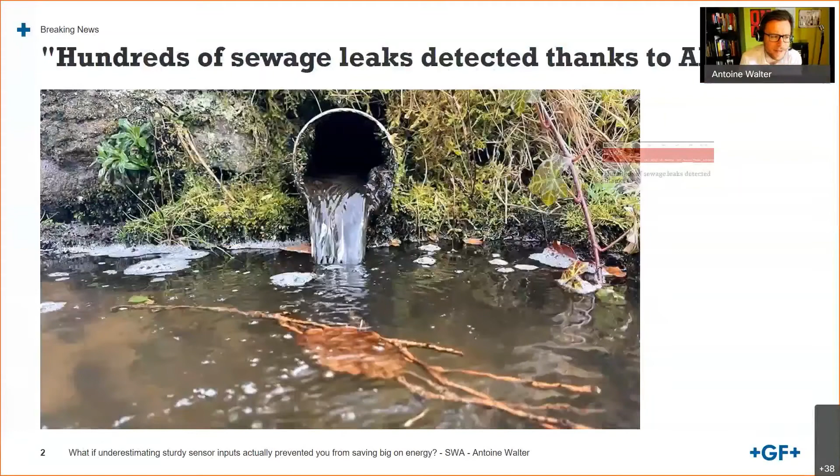Let me here share you something that happened very recently in the UK. It's a story of two wastewater treatment plants that, unfortunately for them, made the news because they were leaking untreated wastewater into the rivers. And not just once, they found out that those two wastewater treatment plants had been leaking sewage for the past decades, approximately 1,000 times. And actually, the operators of those plants never noticed that they were doing that. So they didn't do it on purpose.

It just happened. And the way to detect that was actually to use artificial intelligence. It was a study done afterwards by some scientists in the UK to check on those plants and to see if there was some spillage. And let's see what actually happened.

What actually happened is that those plants were very well operated. So it's not about shaming the operators. And the UK is a highly regulated country, so it's not like nobody would care. But if you're not looking at the right place, there's almost no chance for you to detect something which is outside of your focus.

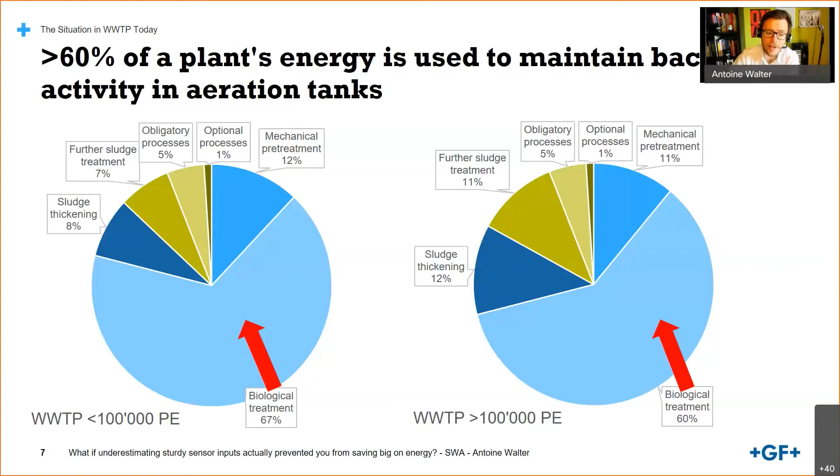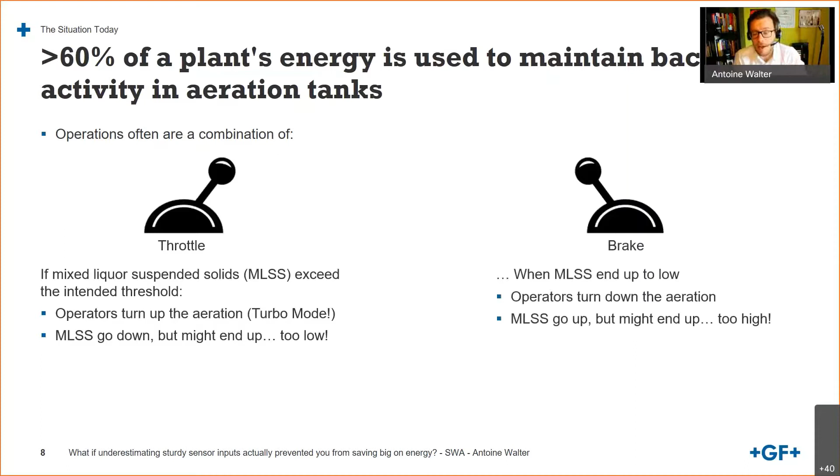Why do we consume so much energy on the biological treatment? Well, because we use a combination of throttle. We look at the mixed liquor suspended solids. If they exceed the intended threshold, you pump up the aeration, push the turbo mode, and they go down. But when they go down, at some point they end up being too low, so you brake. And when you brake, the MLSS go up again, and you can end up in the same situation where they are too high. So what do you do? Well, you repeat.

That sounds crazy when you look at it like that, but that is happening every day in every wastewater treatment plant in the world. It's this combination of one day turbo mode, one day slow, one day turbo mode, one day slow, which means you are never operating at the optimum. And why is that happening? That's happening because we have a hard time nowadays understanding where we stand in terms of organic loads.

It is very hard to predict. It's very hard to understand where this organic load is located when it comes to the secondary treatment, when it comes to this biological step. And that is really difficult as an operator, because if you don't have a clear sight of what's happening within your network and within your plant, you have no chance to do better than what you do today.

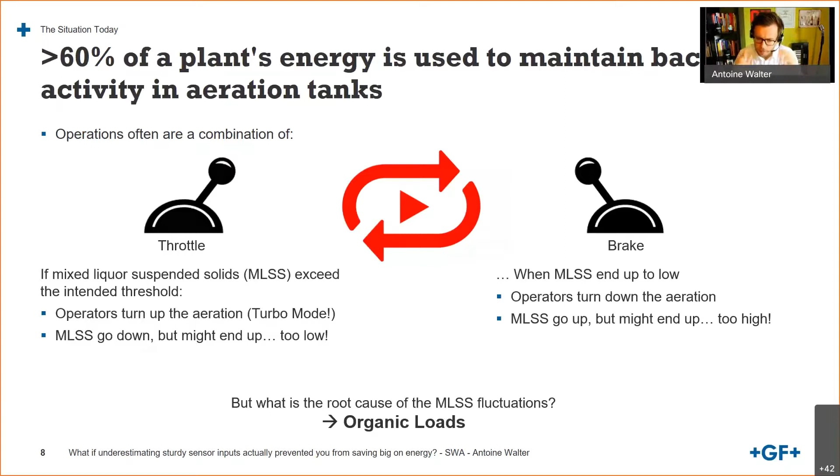So let's look at a very simplified way to underline that problem, and that is this representation of a network. Don't worry, I know there's no network in the world that simple, but just to make it simple, I made it schematic. On the right hand you have the wastewater treatment plant, and on the left hand you have the network. In my network there are 2 industries and 2 residential areas. In real life there are thousands of them, but you're going to see that even with these 2 and 2, it's already difficult. And even with this only 4-step on the right hand, it's going to be difficult.

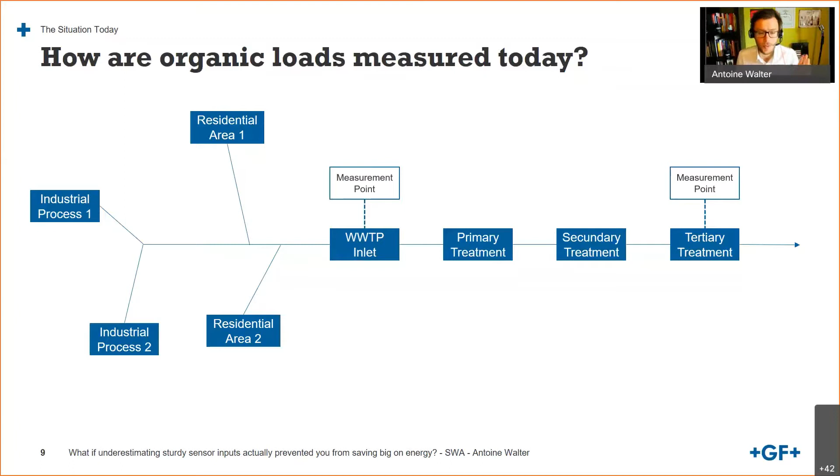Why is it difficult? Because today, where do we measure organic load? We measure it at the inlet of the plant, so at that point you measure everything. And then we measure it a second time, at the outlet of the plant. So hopefully, with this point at the inlet, you get sufficient data so that your plant treats everything to the expected level, so that by the outlet you are within your allowance and reach your expected treatment target, and you don't have to stop discharging or take a fine or be in trouble. But that is still wishful thinking, because actually what you're looking at with that single measurement point at the entry of the wastewater treatment plant is actually this: it is a speed trap.

You might be running at 130 kilometers per hour by the entry, and it should be limited at 50. Well, good, but what happens? You're far too fast, which means you're far too high with your organic load. And the wall is just beneath, because the secondary treatment is maybe 3 minutes of hydraulic retention time ahead from this measurement point. But you have no way to brake, no way to do anything about that.

So basically, everything this indication gives you is: hey, you're going to be in trouble. So what do you do? You push the turbo mode. Then maybe the next day, by the entry of the plant, you're at 10 instead of 50, and you say, hey, too low, I'm going to brake. So that measuring point is not helping you, or not much.

And that's only one problem. The second problem is that measurement point is happening at very best once per hour, because someone is taking a sample, taking that sample to the lab, measuring and analyzing it, and giving you a result. In some plants it's once per hour. In most plants worldwide, it's once per day.

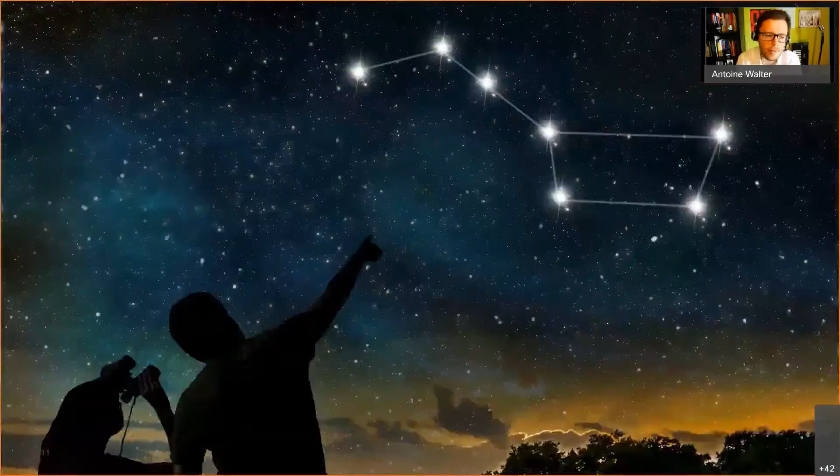The problem is we as humans have a hard time dealing with single points, because when we see single points, our brain builds a story around it and says, hey, it's not just points, I'm seeing the trend. And you end up like that, looking at those points and saying, hey, I see a bear. I don't know for you, but personally, when I was looking at the sky, I never saw the bear. To me it's just points.

If you translate that to the wastewater treatment plant, you see those points, and you see that yesterday I was at 10, and today I'm at 100. So you draw a line, and you expect tomorrow to be at 200. But maybe within the night you were at 200, and now that 100 is already down, you don't know, you don't see the trend, so you don't expect the trend, so you just don't understand what's happening.

All of that to say there was a study done on wastewater treatment plant operators in 3 countries, Switzerland, Israel, and Germany. They were asked: how often, according to you, does the state of your inflow change? And they answered, well, on average, once a month. So they detected as operators once per month that the quality of the water was changing.

In fact, when making in-depth analysis on those same plants, the study showed that those changes in state were happening 3 to 4 times per week, which means almost once per day, and the operators notice it once per month. There's a strong discrepancy between both, and it's hard to stay with this best possible proxy of one single picture, one single speed trap at the entry, because you're missing so much information.

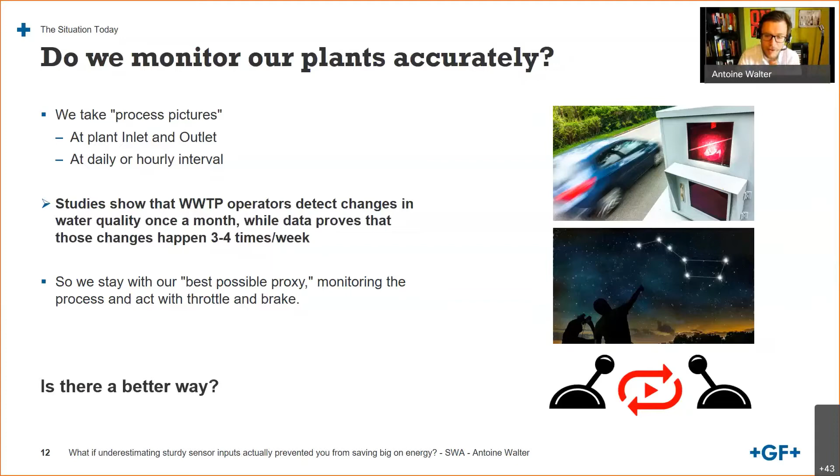Let's put water quality sensors everywhere. And that's good news for us, we're going to sell much more sensors, because it sounds about logical. To better monitor the organic loads, we could add sensors everywhere in the plant and everywhere in the network. But that leads me to a question.

How many do you need? Do you need 10? Do you need 100? Do you need 1,000? Is there a limit? Shall you put sensors everywhere? That's already something we would have to answer.

And the second question is, how much would it cost? Because an advanced sensor which is measuring organic load relies on advanced technology, and there is a direct link between a technology and its cost. So if you start putting 1,000 organic sensors in your networks, it's probably good news for Christine and me, because you're going to buy so many sensors, but probably for you, it's not sustainable in the long run.

And another reason why it's not sustainable is because it's probably not very accurate over time. Because if you start putting many sensors at many different places, it's hard for you to watch those sensors closely. And if you don't watch them closely, they might be drifting and you're not noticing. They might be up for maintenance, or many different things, but you don't watch them closely enough to notice that drift is going to bring you trouble.

And what now if it turns out that after having installed all these sensors in the network, you're not monitoring the right parameters? If you use COD, chances are it's always going to be a good measurement. But maybe you're tracking NH4 and you should be tracking NO3, but you've installed this 1,000 sensors for a good amount of money. Can you afford to change all of them just because it wasn't the right parameter? The good news is that there are some sensors looking at a wide range, namely the spectroscopic sensors, which allow you to be less targeted.

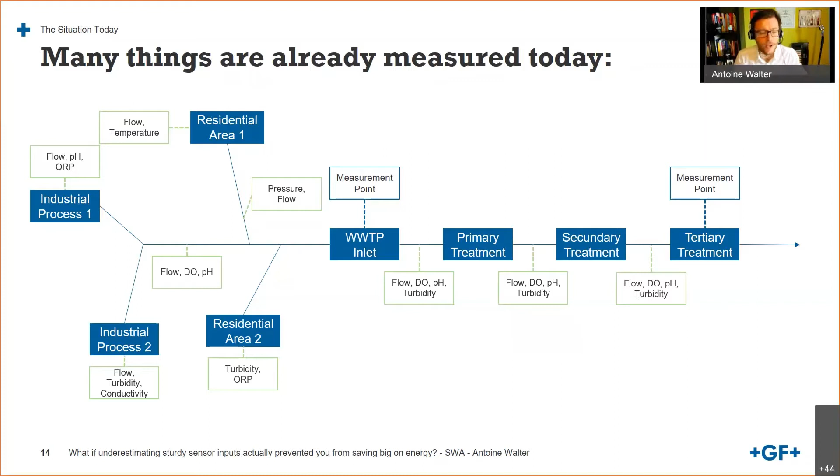You don't need to invest anything more. Those sensors already exist, you are operating them, you know how to operate them. So now the question is, can you make better use of those sensors so that you leverage what you have? You add a layer of information on top of that, and that way you're good to go for the next decade, and for the next 100 years.

Well, actually, let me spoil the rest of the presentation, as you'd expect from this introduction. Yes, you can. You can take basic sensors - temperature, flow, pH, dissolved oxygen, ORP, turbidity, conductivity, you name it - those basic sensors. And with the help of new technologies, you calculate or predict the other ones. You calculate COD, you predict NH4 over the course of the next 24 hours, or the next 10 minutes.

And that is what it's all about: using existing data to build what you need to operate your plant. That's what we call soft sensors - soft standing for software, so software sensors. Basically, to go towards these software sensors, we have a 6-step approach.

The first step is to pick an industrial site. That's what we did for the proof of concept, but that could be your plant, your site. And there, to gather this basic parameter data. So basically, we look at what's existing, what we don't need to add within the plant to really leverage the existing setup. Ideally, you have a data logger already existing, which means we can reconcile data of the past years. That's what happened on one of the pilots we did.

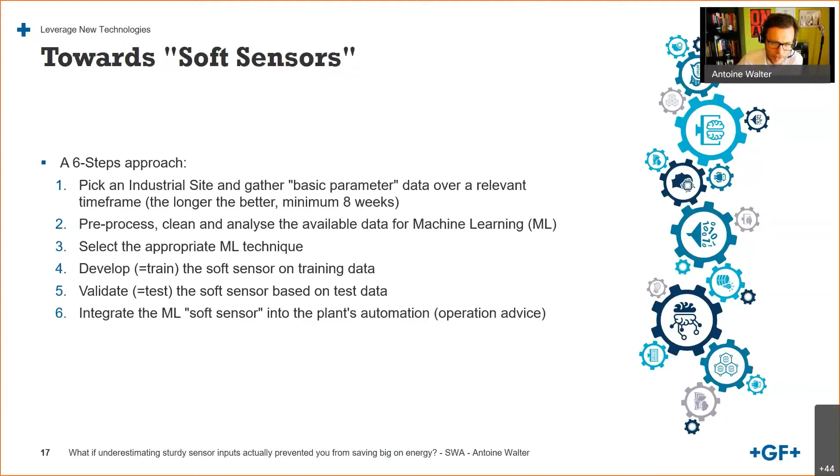So let's dig a bit deeper into those steps, and let's start with the data acquisition. I shortly alluded to, we were running 2 pilots in industrial parks in China, just because we were working on a parent project. I'm not entering into the details of the parent project, but what we were looking at was how can we leverage stream synergies?

If you have one stream which has a pH of 4 and one stream which has a pH of 10, can we mix those streams in order to reach a pH of 7? Not going into the details—if you want some information on that, I will be very glad to exchange with you after this conference.

And on that cloud platform, we started gathering data. So basically, we were leveraging the existing hardware, taking the outputs of pH, of flow, of pressure everywhere in the plant, driving that to this online platform.

And in this online platform, we were putting a timer so that we were always looking at the past, so 24 hours in the past. Again, for safety reasons, it's an industrial park. On an industrial park, if there's one thing you want to avoid on the pilot, it's disrupting anything that might be happening on the plant.

And we were adding on top of that lab analysis, done by the operators of the plant. So basically COD, NH4, NO3—they were drawing samples, taking them to the lab. In the lab, they were analyzing the samples, and the result of all of that was put on that on-premise cloud platform. So that was our data acquisition.

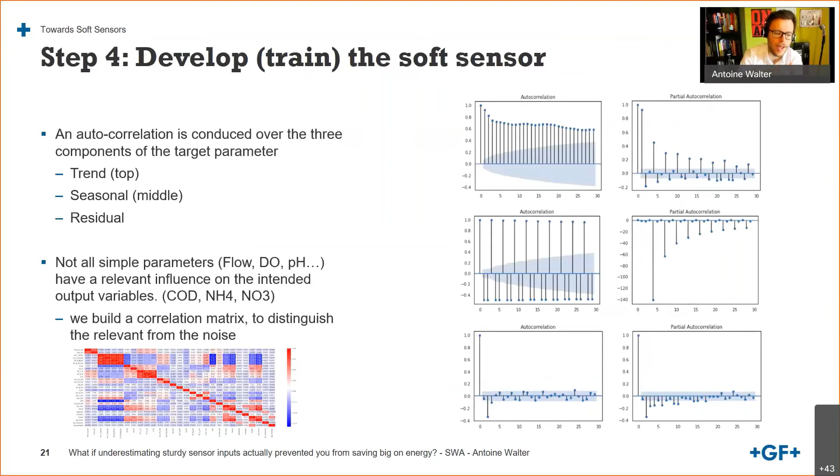What's interesting here as well is that for two plants, those main parameters were not the same. For one, it was a combination of flow, dissolved oxygen, and pH as the third one. For the other, it was pressure on some lines, flow again, and conductivity. So different sets, but it's almost a rule: you can usually find 2 to 3 main parameters, and then all the other ones, if you have them, you're going to be a bit more accurate because you can build that matrix. But if you don't have them, you're not really going kilometers away from the rule.

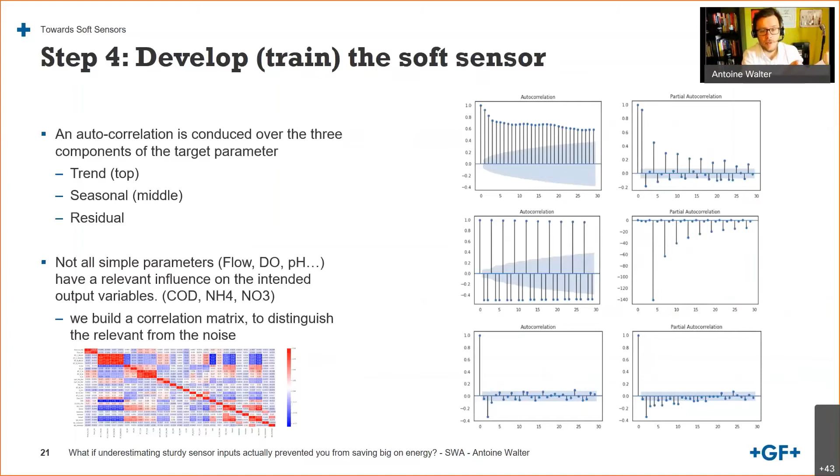So that was the step of training of the soft sensor. Again, acquiring the data was 2 months. Training the soft sensor is another 2 months. Then we had the fifth step, which is the validation of the soft sensor.

What's important here is that I mentioned the speed trap element with the measurement in the wastewater treatment plant. It would be a pity that our full process delivers something which is again doing pictures. So it's not. In machine learning, there's learning, which means our sensor keeps learning over time. When you start the sensor, it already has a very good accuracy, and that's why we say we go to step 5, validating. But it's not yet at its very maximum because it will keep improving over time. So we use a learning algorithm to measure the difference between the calculated output and the real output, and to keep adjusting the weight of various parameters.

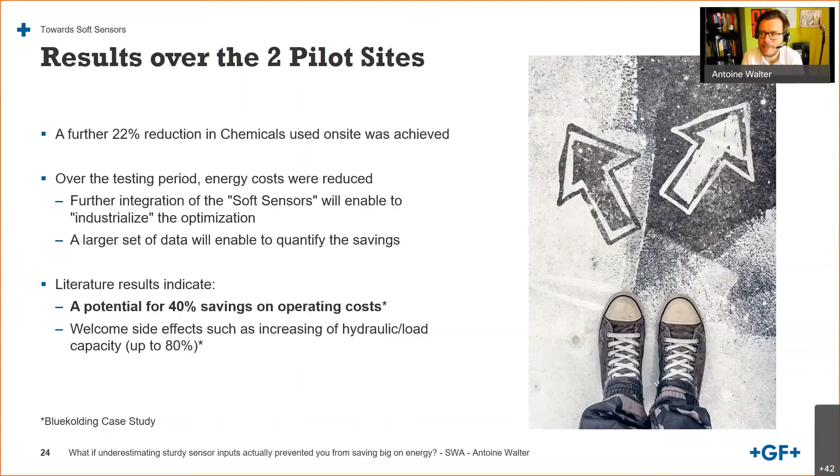All this revamping wave we currently see in Singapore is partially because you need additional capacity. So now imagine that software will be providing you this hardware additional capacity - that is a fully other scale of savings. You just don't need to invest in new plants, or less compared to the existing. So the primary focus is OPEX reduction, but there's also a cool story beyond that: you're working more with nature and less with chemicals, you're treating higher loads, and you have less bad surprises as an operator because your biology suddenly gets upset on a Saturday evening. So there are a lot of welcome side effects.

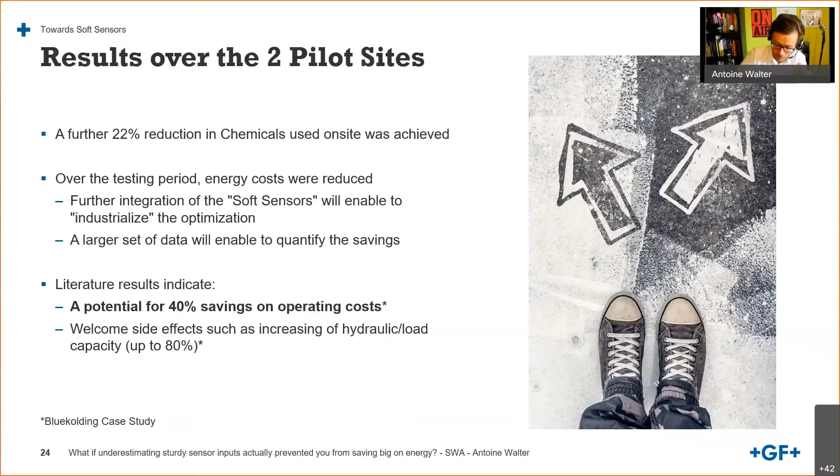And therewith, that brings me to my outlook and my conclusion. The future might be complex - that was my introduction. But the future will always be building on the shoulders of the present, which means if we are leveraging the right, simple, sturdy bricks, we have all the Lego pieces to be building the future.

Exactly like YouTube needed to be a video dating site to find out that one day they would become what they are today, exactly like Spotify needs to put up some music from some unknown band in the middle of nowhere to find out the new hits everybody will be listening to in the future, exactly like Instagram had to be Burbn and offer a full set of useless features to find out that people wanted to share pictures - exactly like that, you need to leverage what you have, flow, temperature, pH, conductivity, to be the bedrock of data which is going to help you overcome the new challenges still to come.

And that's true for the next 5 years. That's true for the next decade, but that's also true in the longer run, because you never know what the challenges of tomorrow will be. And now, last but not least, just a final thought.

Chances are that within this presentation, hopefully not because I was so interesting, but I have to be realistic as well, chances are that you watched your smartphone 8 times. We are watching our smartphone on average 150 times per day, and we react to an SMS within 4 minutes. How can it be then that if my wife sends me an SMS saying, 'Where are you?' I answer straight away to tell her I'm in the garden.